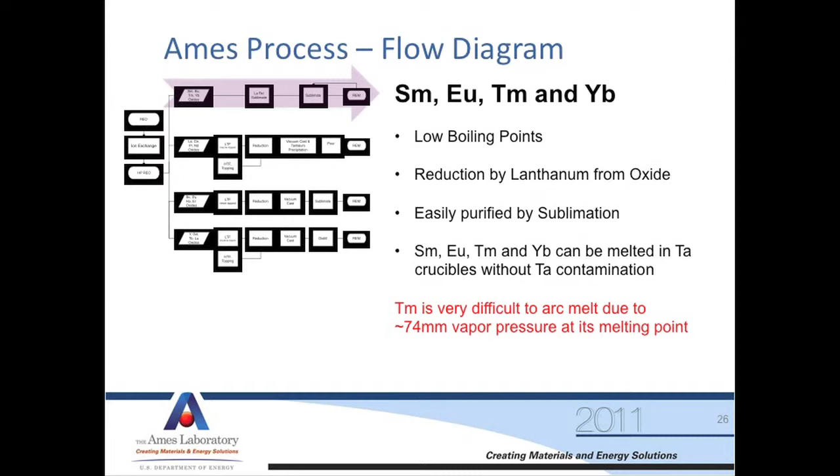Process: we have to prepare all our tantalum crucibles in advance. We have to dry the oxide to desorb any water and carbon dioxide.

Then we have to make lanthanum chips for reduction, and we actually mix those together in a bag, kind of like you're making a shake and bake, and we'll stuff those into our tantalum crucible, put it in an induction furnace, and heat it all under vacuum. That's where the reaction takes place - the lanthanum becoming lanthanum oxide, and the metal, for example samarium, being released.

Then we'll do another step where we sublime it, and then we simply strip the tantalum off like you're opening a sardine can.

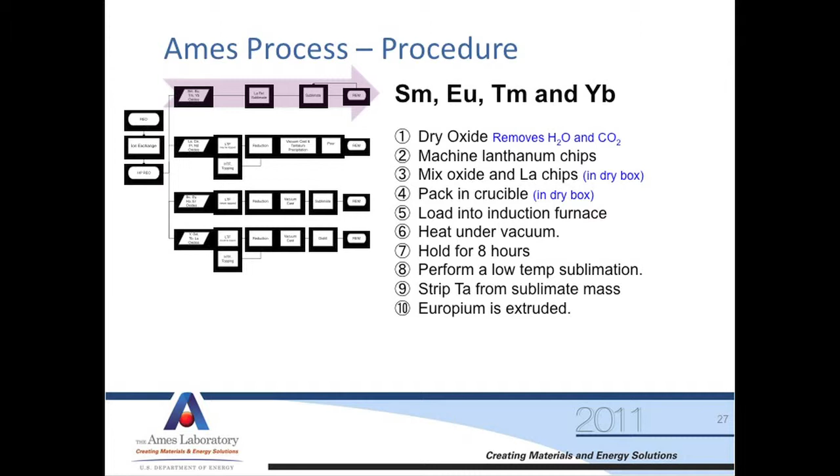Europium, we go to the next step, is we actually extrude the europium into rods. The reason we do that is to reduce the surface area of the material because it's so reactive with air.

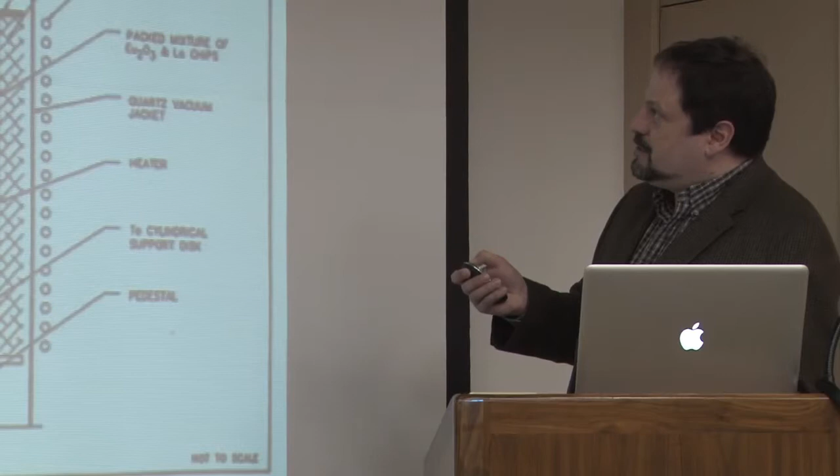This finely detailed image, which is kind of hard to see from where you're at with this bad projector, shows our setup. This is a quartz containment for our vacuum. This hatching is graphite insulation on a tantalum boiler or heater can, as we call it.

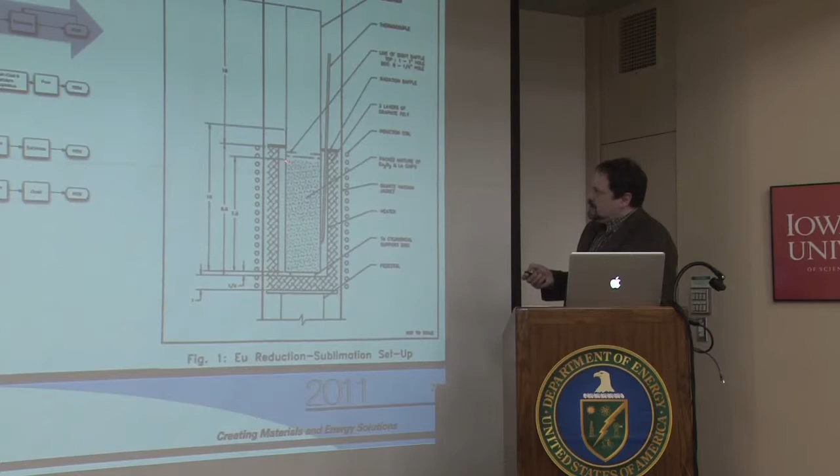This is what we call the boiler can, or reduction vessel, also made of tantalum, and here's the mixture. Heat it up, the metal gas comes up through the baffle and collects somewhere on the inside of this condenser can.

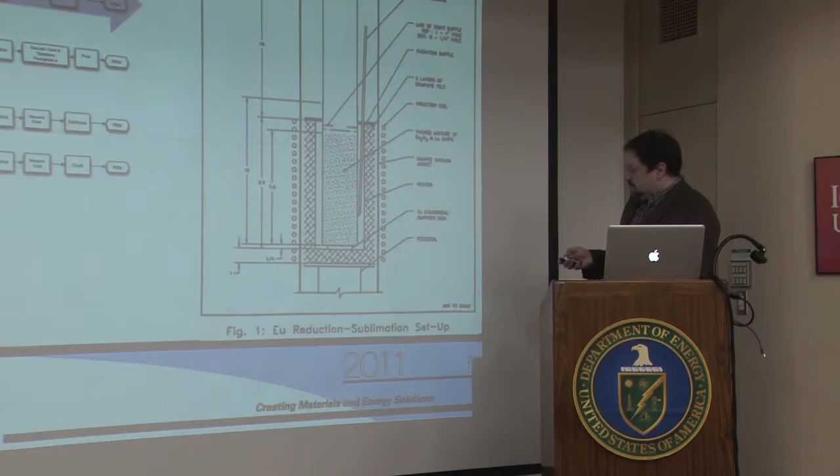This is the image of the induction system. These are the coils. This is the quartz containment.

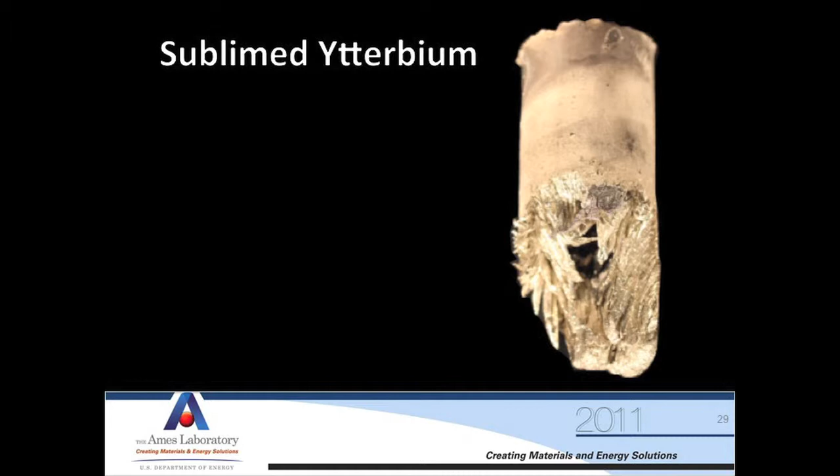This picture here actually shows you what it looks like when we've made the sublimed material. This is ytterbium, and if you remember the condenser can sticking up in the top of that schematic, this would be the top of the condenser can, and it would have come down a ways, and then the boiler can would be somewhere down here on the floor. All the metal moves up and plates itself, and you can see this kind of stringy texture to the metal.

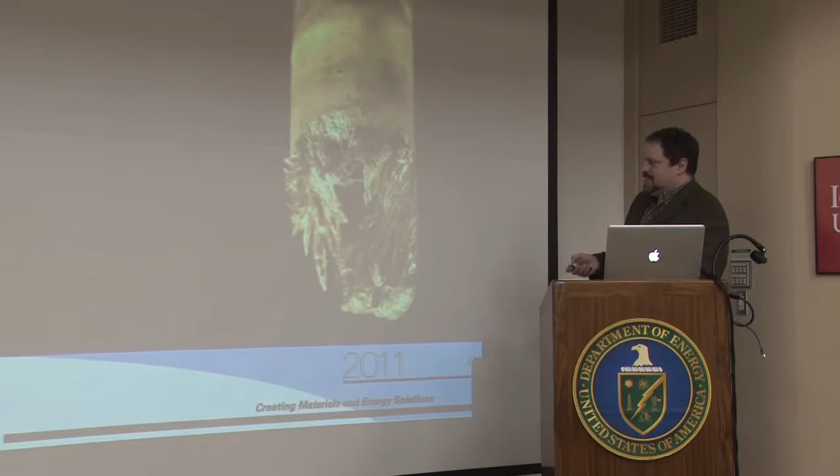Next group, the light rare earths - lanthanum, cerium, neodymium, and praseodymium - are the next easiest to make. If you remember from the vapor pressures, they had the lowest vapor pressure, i.e. highest boiling points, and they were very low melters.

We can use that to our advantage because we can vacuum cast these without loss, meaning any impurity that's volatile, we melt it under vacuum and they come out, leaving the metal we want behind. The tantalum solubility is pretty low, but because the vapor pressure is so low, we don't distill or sublime.

We do what we call pouring. If you go to the Ames Lab YouTube channel, you can see a video of the pouring process - we'll look at it schematically. We call it lanthanum decanting on the video. Decanting really describes what we're doing more than pour - pour is our local slang for what we do.

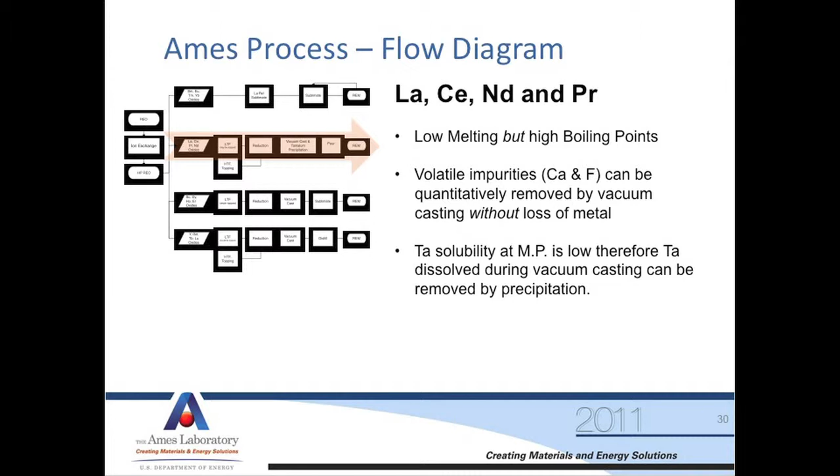But the process is very similar. We dry the oxide, but we do one more step that we don't do in the first group: we fluorinate the oxide. Mix that with calcium, heat it, remove the slag. We'll do 3 reductions, one on top of the other. We'll see that, then we vacuum cast at high temperature.

This pouring process is where we cool to just above the melting temperature - I'm sorry, it's a precipitation process - and we precipitate out the tantalum that may be in there. Then we decant, or pour away from the precipitated tantalum. In this case, we can machine off the crucibles and cast into arc melt ingots.

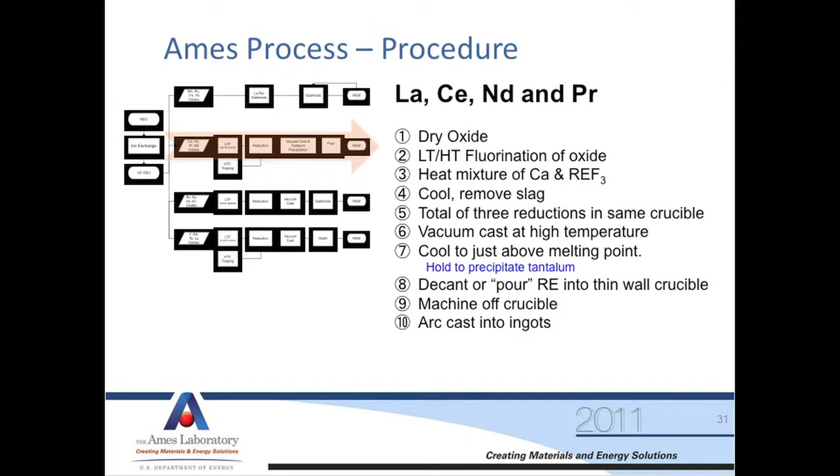Our fluorination starts in a fluorination furnace, which is really pretty boring. It's just a box with a tube through the center of it. Even the schematic is kind of not very thrilling, is it?

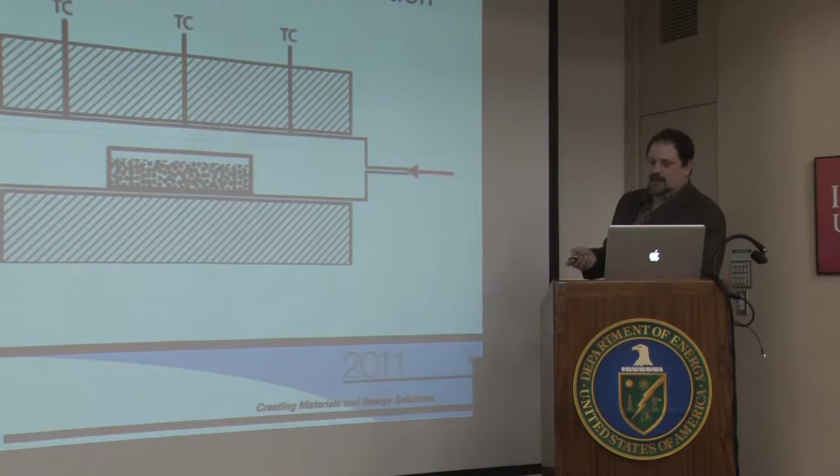We feed in HF gas and argon. It comes over here, we get a gas-solid reaction, which produces the rare earth fluoride. Water is a byproduct, and we push that all out the end as a gas. We take that high purity fluoride...

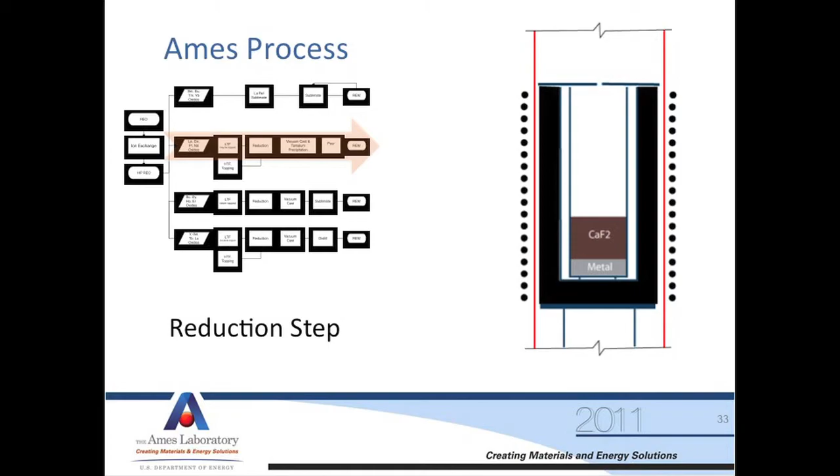We'll heat that up, they'll react, and what happens is they'll separate. The rare earth metal of interest collects at the bottom, and the calcium fluoride slag floats on top. You've got to be hot enough to melt both of these, but they separate like this. Hopefully you'll take that calcium fluoride out by just turning it over and it drops out, if you're lucky.

Then you do it again, right on top of the previous metal production run there. And you do it again. So we do that about 3 times. We end up with several kilograms of metal.

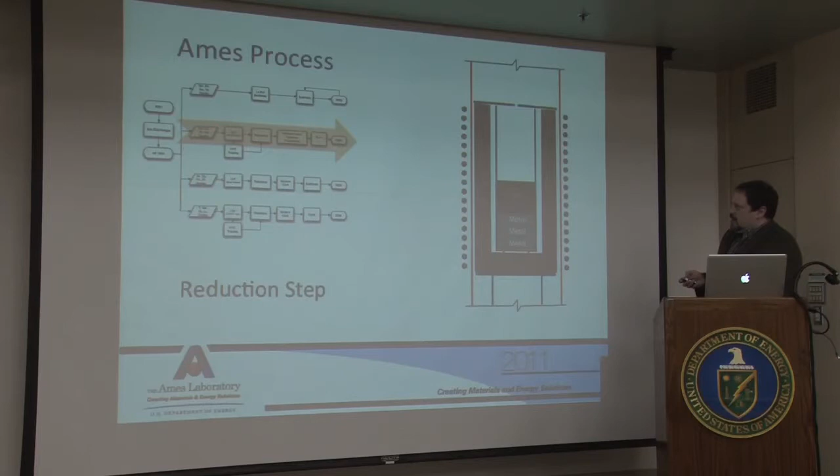We'll move on to the vacuum casting step, which is essentially exactly as it sounds: melted into a vacuum. Here's the reduction process and/or vacuum casting process in action. It looks exactly the same.

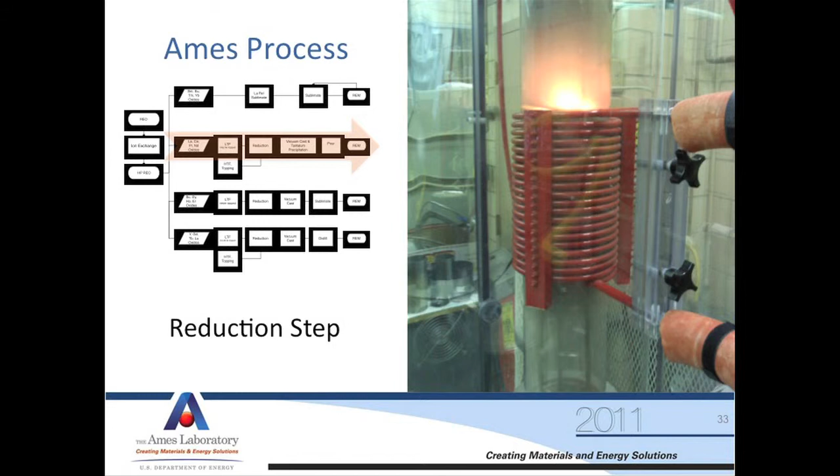And when you're done with the reduction, here's our calcium fluoride slag. This one did come out very nicely. If it doesn't come out nicely, you literally have to get a foot-long chisel and chisel it out by hand, and it takes you a long time. And you can't be very aggressive with the chiseling because you don't want to damage your crucible while you're doing it.

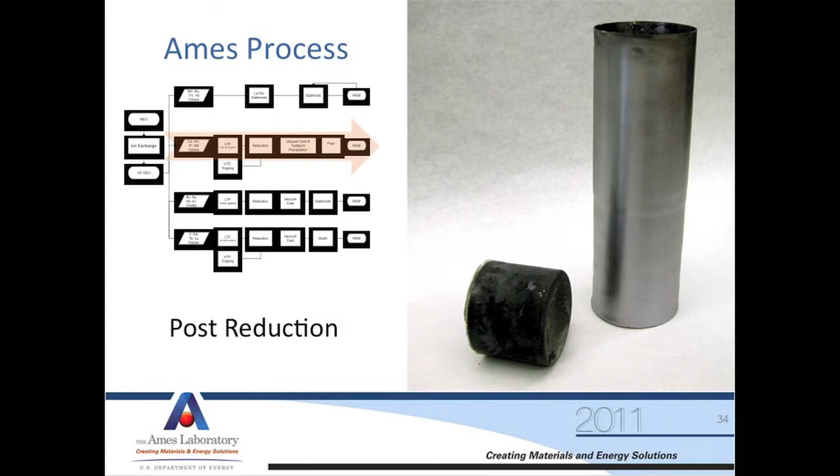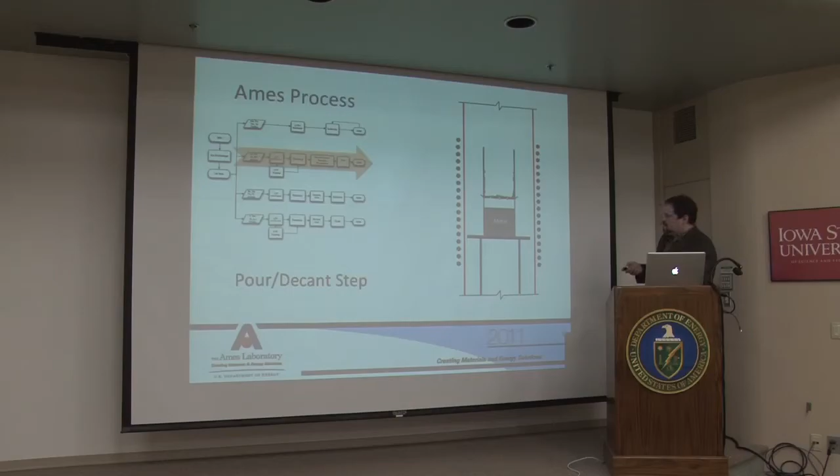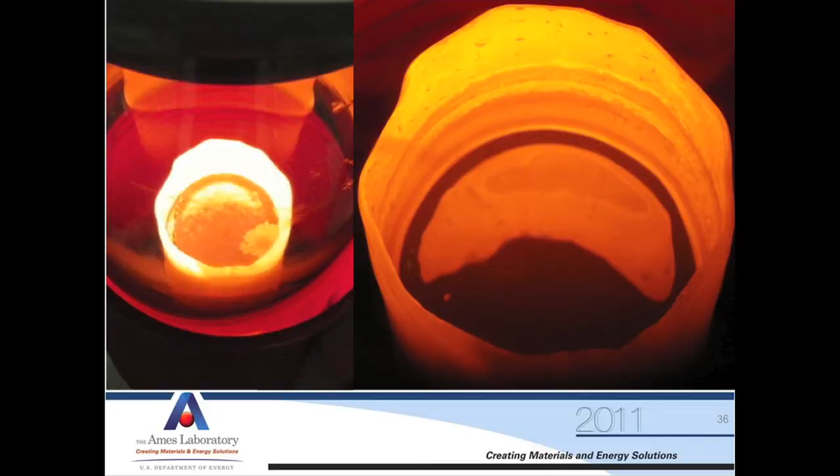And we lose a little of our metal, but not a lot. This is a picture of the pouring process in action. This first one is before it's melted, and you can kind of see the texture on the surface. This more mirror-like surface indicates that it's molten, and it's partially flowed out because here is the initial level of the metal.